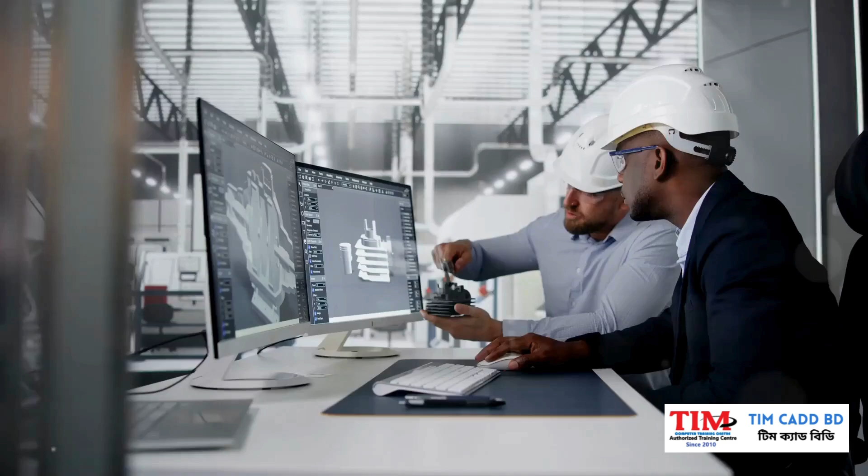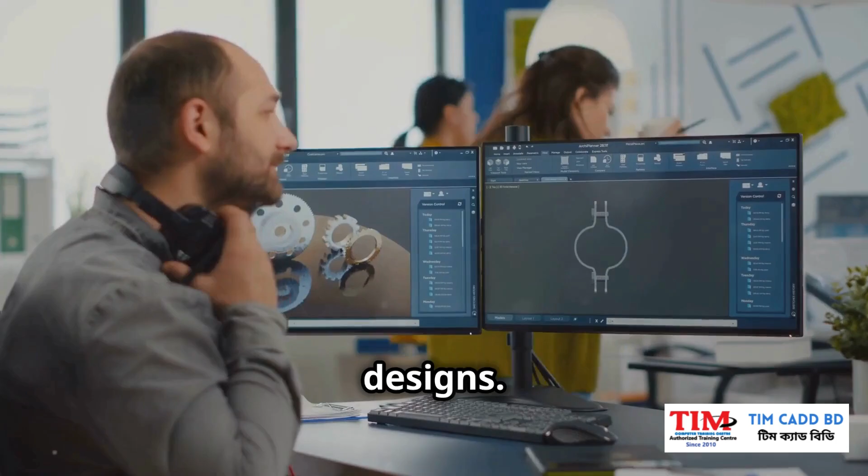AutoCAD is a powerful software application. Engineers, architects, and designers use it widely. It allows professionals to create precise and detailed designs. Proficiency in AutoCAD is essential for engineering students. It is a widely recognized software in the industry.

Learning AutoCAD can significantly enhance your job prospects. AutoCAD skills are valuable across a wide range of engineering disciplines.

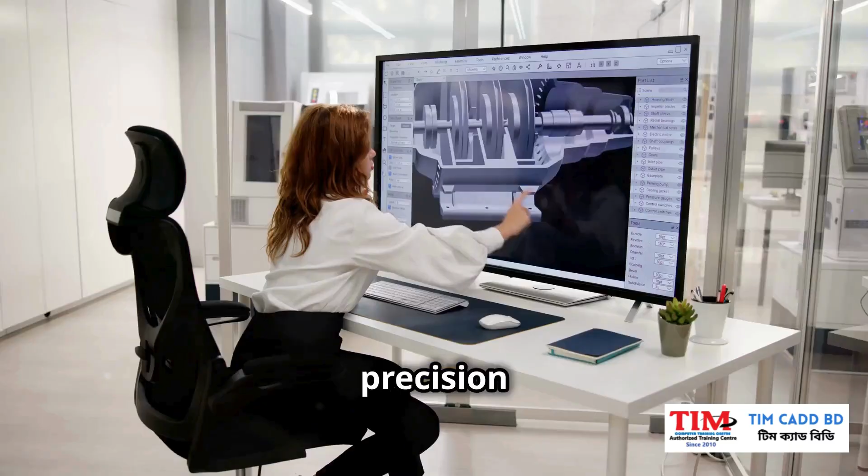AutoCAD enables engineers to create designs with high precision and accuracy. This is crucial in engineering projects where even small errors can have significant consequences. AutoCAD allows for precise measurements. It helps engineers avoid costly mistakes.

The software provides a wide range of tools and features. These tools aid in creating accurate drawings. Engineers can input exact dimensions and tolerances. This ensures that the final product meets the required specifications.

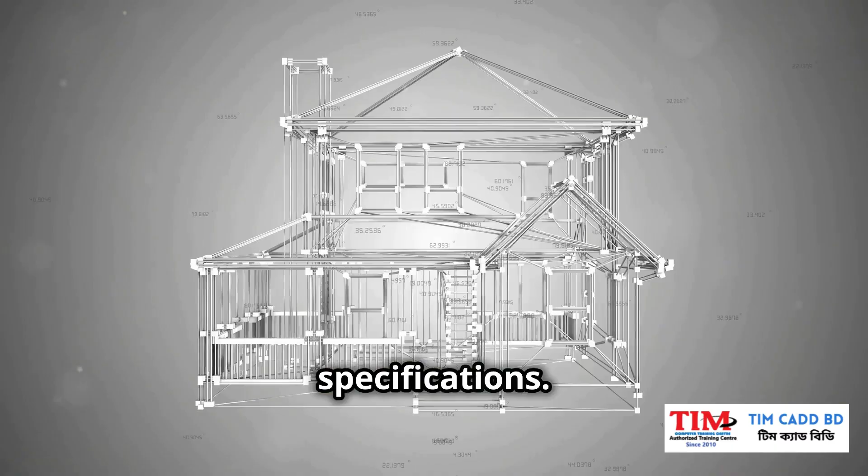Furthermore, AutoCAD's precision extends to three-dimensional modeling. This allows engineers to create realistic representations of their designs. They can detect potential clashes or interferences between different components.

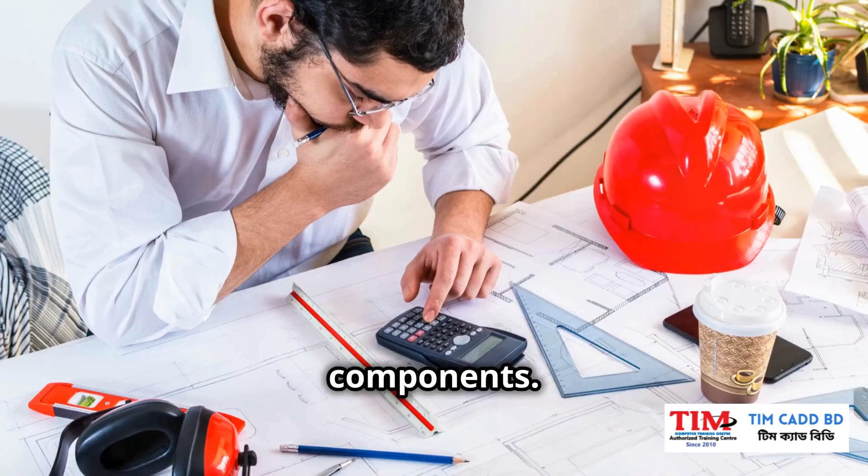By using AutoCAD, engineers can streamline the design process. They can easily make revisions or updates to their designs. This reduces the likelihood of errors. It saves time and effort in the long run.

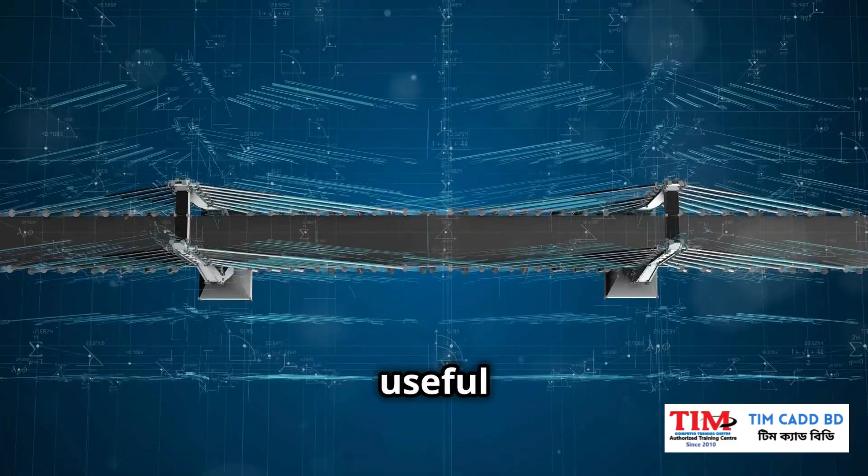AutoCAD's three-dimensional modeling capabilities are invaluable for engineers. They allow for the creation of realistic visualizations of complex projects. This is particularly useful in fields like civil engineering, where visualizing large-scale structures is essential.

With three-dimensional modeling, engineers can create virtual prototypes of their designs. They can rotate, zoom, and pan around the model to inspect it from different angles. This helps in identifying potential design flaws or areas for improvement.

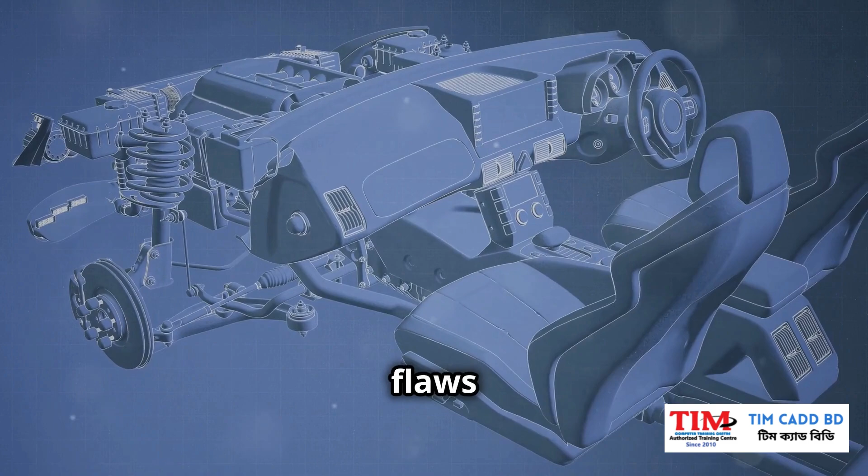Moreover, three-dimensional models created in AutoCAD can be easily shared with clients and stakeholders. This facilitates better communication and understanding of the project. Clients can visualize the final product more effectively. This helps them provide feedback during the design phase.

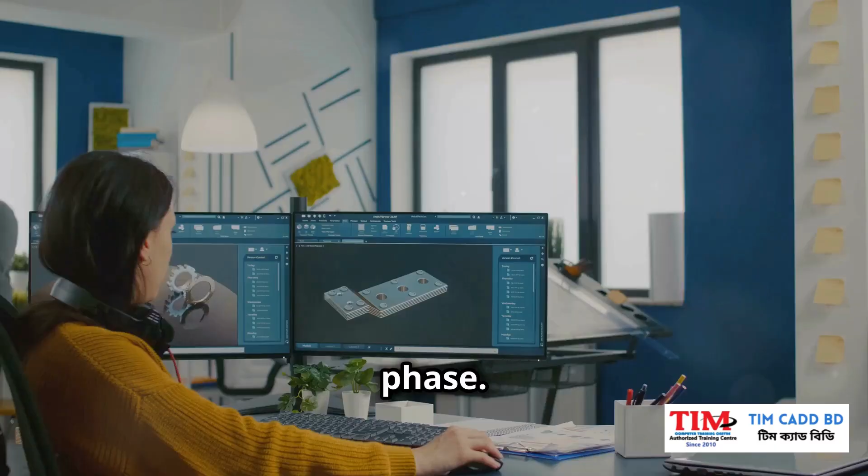The ability to create three-dimensional models also enhances problem-solving skills. Engineers can experiment with different design iterations virtually. They can find optimal solutions without the need for physical prototypes.

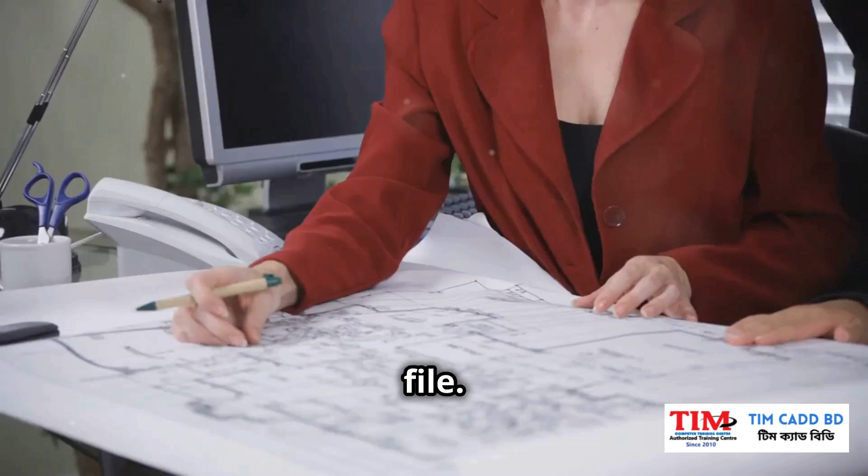Section 4: Teamwork and collaboration. Collaboration is crucial in engineering projects. AutoCAD facilitates teamwork by providing a shared platform for engineers. Multiple team members can access and edit the same file. This allows for real-time collaboration and reduces conflicts.

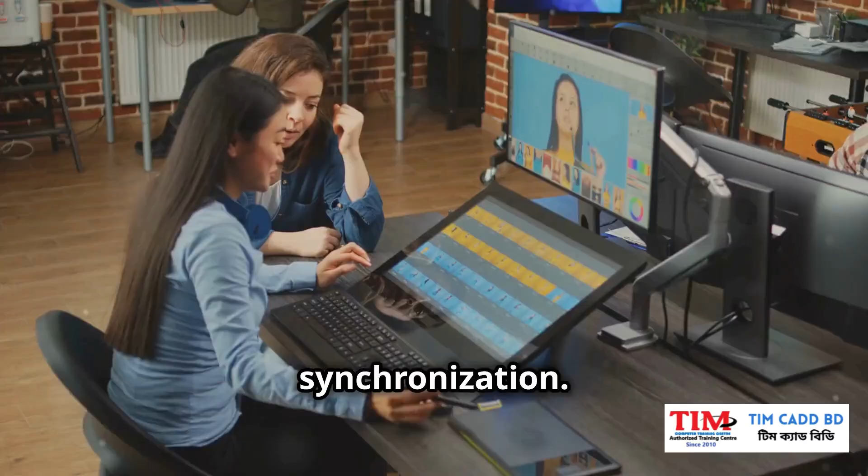AutoCAD supports external referencing. This ensures design consistency and integration. Cloud-based tools allow seamless sharing and synchronization. AutoCAD fosters teamwork, reducing errors and improving efficiency.

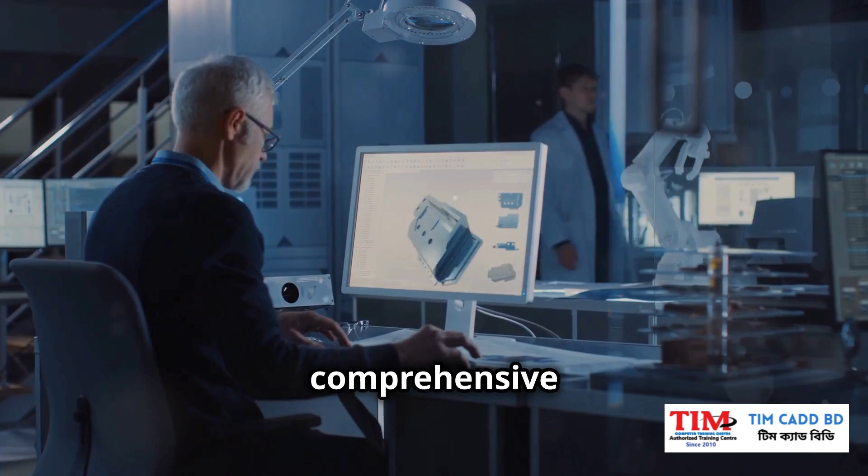Section 5: Streamlined workflow and efficiency. AutoCAD streamlines the design process, saving engineers valuable time and effort. Its intuitive interface and comprehensive tools automate repetitive tasks. This allows engineers to focus on more critical aspects of the design.

AutoCAD's layering system enables engineers to organize their drawings efficiently. They can separate different design elements, such as walls, doors, windows, and electrical systems, into distinct layers.

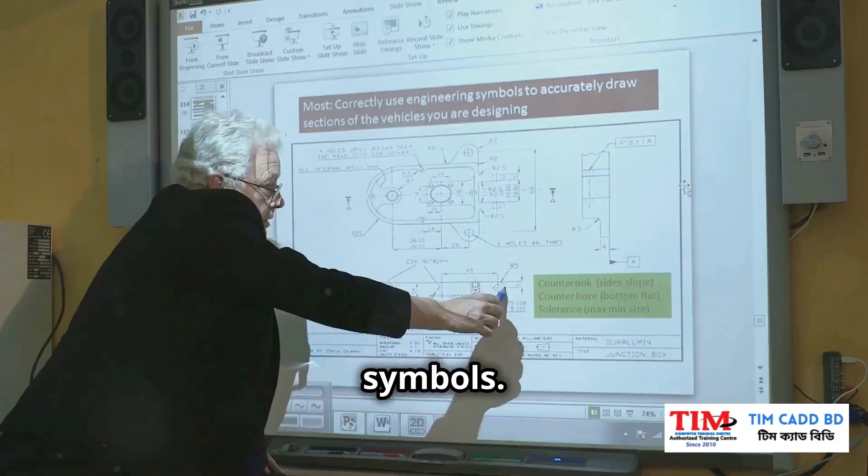The software also offers a vast library of pre-drawn components and symbols. These can be easily inserted into drawings, saving engineers the time and effort of creating them from scratch.

Moreover, AutoCAD's automation capabilities allow engineers to create custom scripts and macros. These automate frequently performed tasks. This further enhances efficiency and reduces the likelihood of human error.

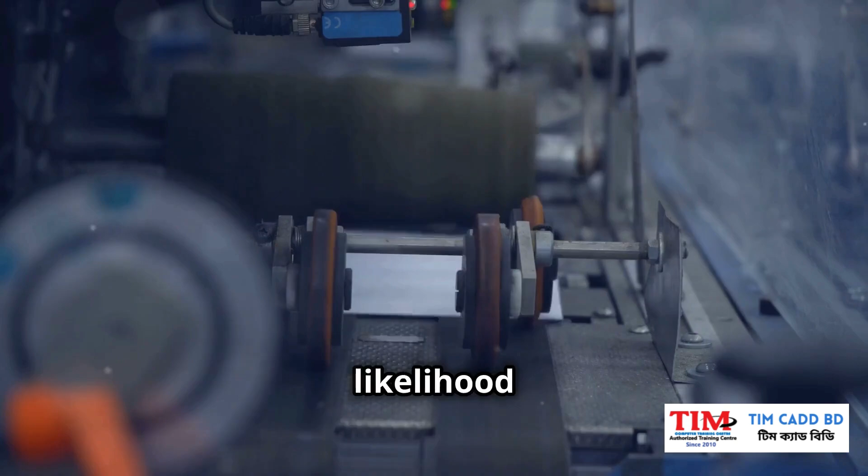By streamlining the design workflow, AutoCAD empowers engineers to be more productive. They can complete projects faster and with greater accuracy.

Getting started with AutoCAD training. Numerous resources are available to help you get started.